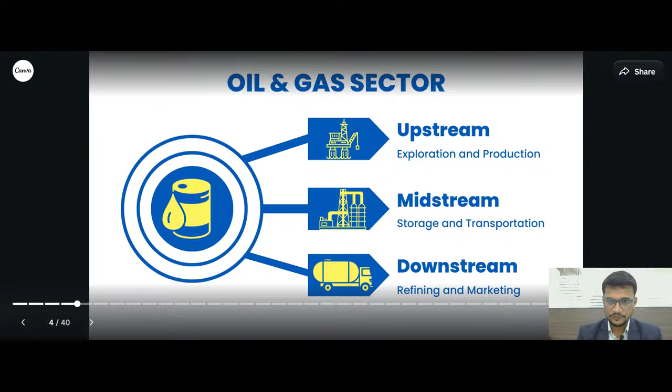Okay, so we'll move further. So as we discussed earlier, during the upstream what we do, during the midstream what we do, and during the downstream what we do.

So as you can see on your screen, there are different industries for different kinds of operations. When I say upstream, what do we do? We extract the crude oil or hydrocarbons from the earth. To do the natural gas extraction or production, the technology provider or equipment we use are different. The same way for pumping oil or taking it out from the earth's crust, there are different technologies. Now, once this crude oil is taken out from the earth, we need to put it somewhere.

So we need to design the storage terminal. Now, when we do piping engineering, it is such kind of training program where we give you knowledge about upstream, midstream, and downstream. So in the midstream, there is the storage terminal and the storage, or we can say the tank farm. So there is the calculation to design such kind of tank farms.

So how much should be the height of the tank farm? How much volume it should occupy? How much space I need to provide on each side of that tank so that if any spillage happens, how to control and mitigate such problems. So each and every concept and calculation is very much important while doing the engineering.

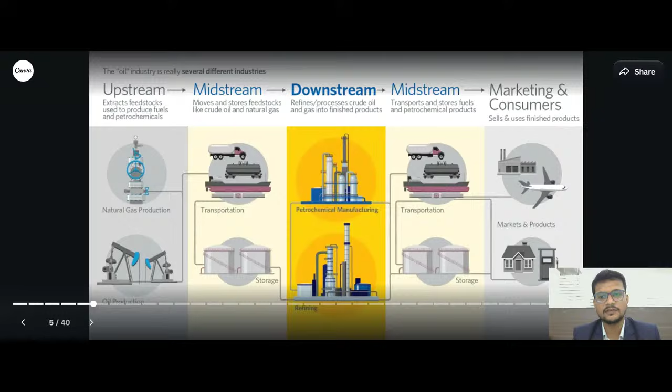So we have to further explain about the export oil and gas opportunity. Oil and gas, also known as hydrocarbons, provide much of the energy needed to power homes, cities, and industries around the world. Offshore wells are drilled by companies to discover oil and gas, or to develop and produce already discovered reservoirs to process into usable energy.

Woodside is Australia's largest independent oil and gas company, known for our world-class capabilities as an explorer, producer, and supplier of energy. Over our 60-year history, we have safely drilled over 600 wells in offshore environments, both in Australia and internationally.

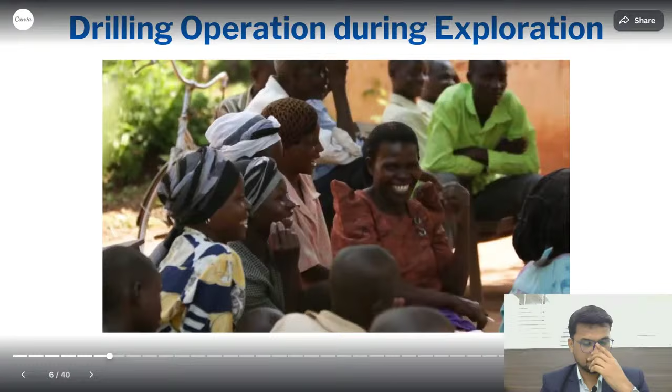Before drilling, Woodside undertakes detailed well design and logistical planning, applying good industry practice to ensure our wells are drilled safely and potential impacts to the environment and other marine activities are minimised. We consult with stakeholders, including local communities and fishers, to explain our planned activities and understand how potential impacts can be avoided or minimised. These potential impacts and other possible hazards associated with the drilling activity are monitored and managed throughout drilling operations.

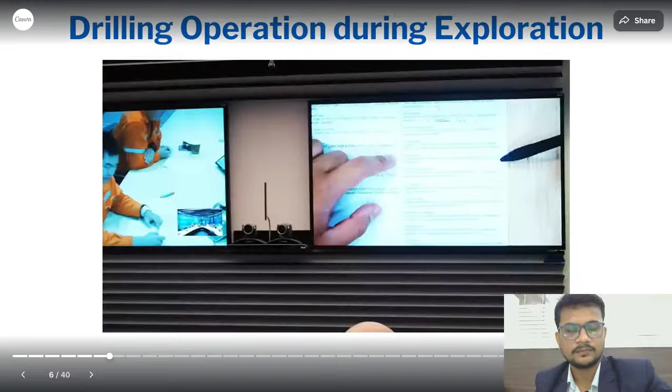Woodside also prepares environment plans that detail how drilling will be undertaken and obtain approval from relevant regulatory authorities before drilling commences. Wells can be drilled by either a drill ship or a drill rig, known as mobile offshore drilling units or MODUs, depending on water depths and other factors. To ensure the safety of other marine users, vessels not involved in drilling should stay at least 500 metres away from the drilling location while in operation.

This is called a safety exclusion zone. Once the well is complete and drilling infrastructure is removed, marine users are generally free to resume normal activities. While technical differences exist, the process for drilling all offshore wells is similar and take place in several stages. Before any drilling, a remote operated vehicle or ROV is sent to assess the condition of the seabed.

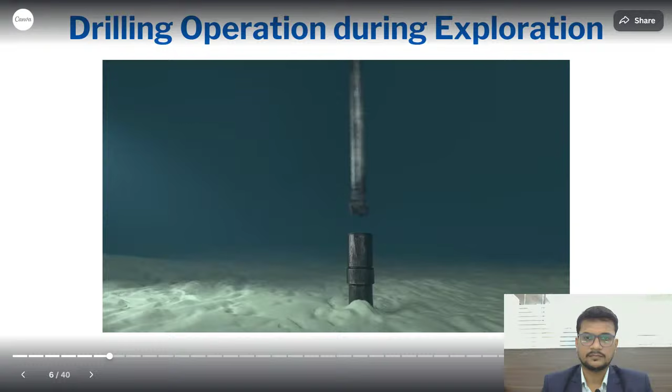A hole is then drilled into the ocean floor using a large diameter drill bit, and steel pipe called a conductor is installed, providing the well's initial structural support. A smaller drill bit is then lowered through the conductor to drill the next section, which is called the top hole. Once it reaches a predetermined depth, more steel pipe called casing is installed, supporting the newly drilled hole.

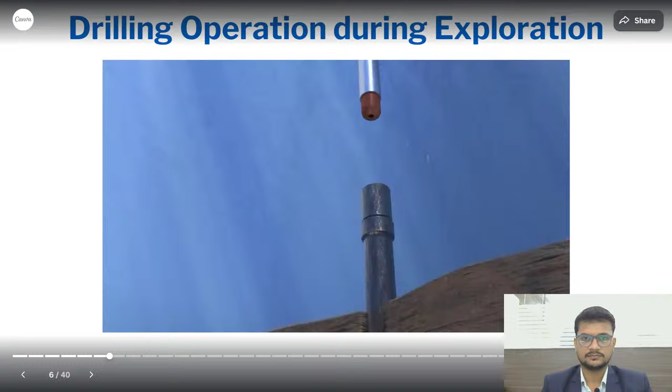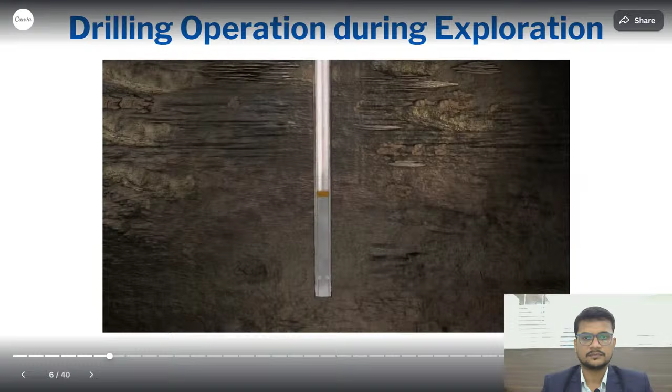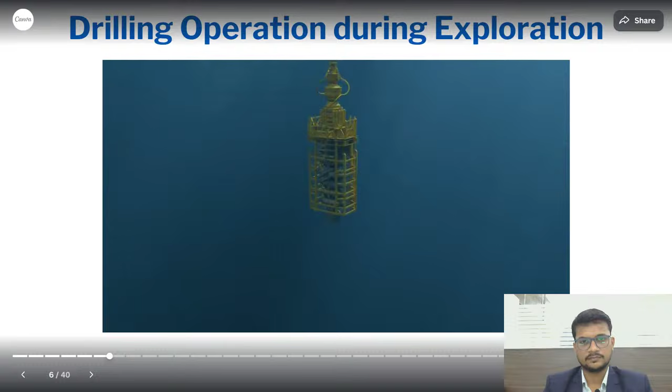Cement is pumped through the casing, moving between the casing and the drilled hole, securing it in the ground. The cement is allowed to set before drilling continues. Before drilling deeper, a blowout preventer, or BOP, is installed on top of the well. The BOP is a large, specialised safety device used to seal, control and monitor wells to prevent uncontrolled release of fluids.

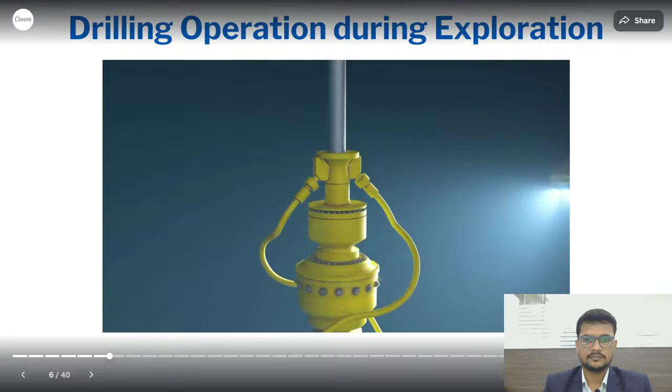After the BOP is secure, a smaller drill bit is lowered into the hole to drill further, and more casing is cemented into the ground. This step is repeated until the well reaches a specific depth where the targeted reservoir is predicted or known to sit. This is called total depth and can be several thousand metres below the seabed.

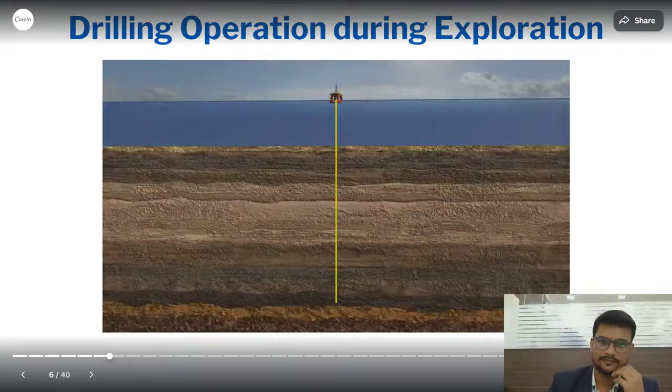Drilling fluid, sometimes called mud, is continuously pumped into the hole while drilling. This helps keep the drill bit lubricated and cool to prevent overheating, prevents the uncontrolled flow of wellbore fluids, and transports drilled rock cuttings back on board.

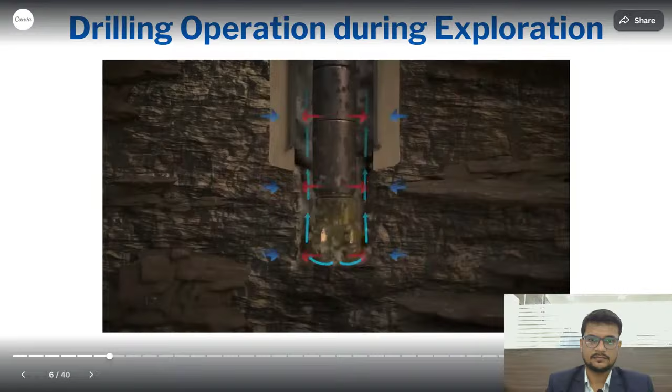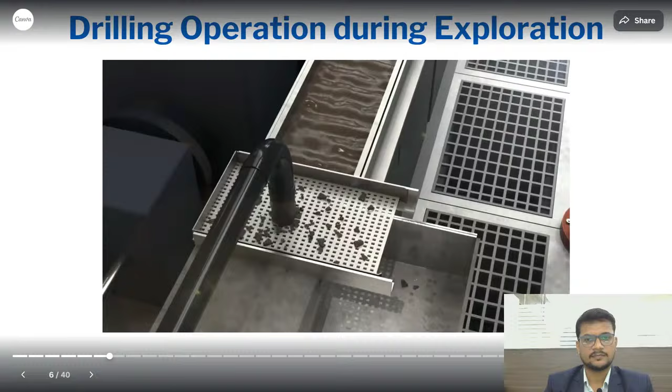Rock cuttings are then separated from fluids using shakers. Fluid is returned to tanks on board the rig. Where required, cuttings undergo additional processing before being carefully discharged below sea level. The volume and properties of drilling fluid are continually monitored to ensure the well is drilled safely.

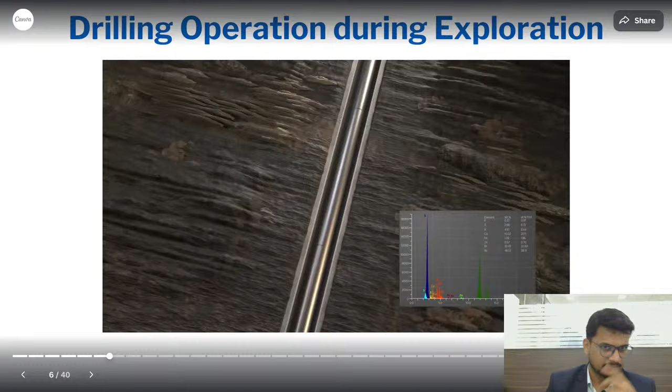Once total depth is reached, tests are run to understand the geological properties of the intersected rocks. Information on any hydrocarbons found is collected through rock and fluid sampling.

The information gathered can be used in a variety of ways, such as informing future exploration activities, development planning, or optimizing production.

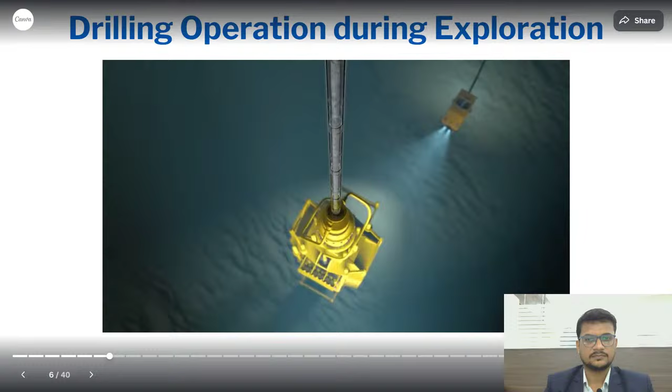Once wells reach the end of their life, they are made safe by sealing them with cement. This is called well abandonment. Before leaving the location, an ROV surveys the seabed again to assess and record the condition of the area.

Woodside takes pride in the health, safety, and environmental performance of our drilling activities. We are committed to world-class environmental management in our exploration activities and in the design, construction, and operation of our facilities to help provide for the world's future energy needs.

So, have you understood, guys, how this exploration takes place? It is pure engineering. We need to first do the survey, figure out the location, then make sure that no maritime activity gets harmed because of that, and then we do the drilling.

If you have heard everything correctly, once the drilling operation is started, we need to put the cement so that the pressure coming out from the walls or the seabed, and at the same time the pressure of the water, is mitigated. Then and only then can I extract the oil from it. This is the basic concept we learn under fluid mechanics.

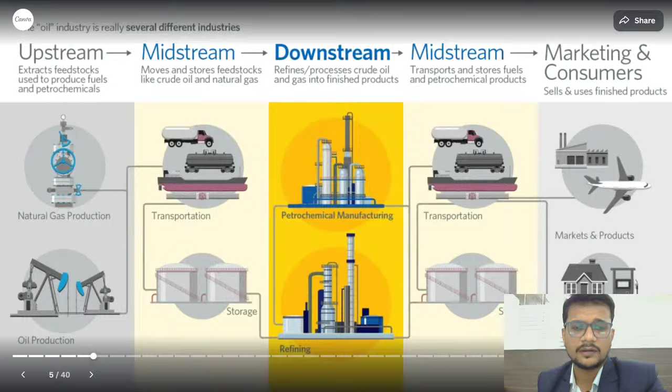So moving further, there are different career opportunities for each and every engineer. Now let's say if I talk about process engineering, so when we say process, we are well aware that mechanical, electrical, civil, EXTC, electrical, IT, computer engineers are all involved.

How, what kind of raw material am I getting? What will be the temperature? How am I going to separate it? What are the different equipments that will be needed? So all this knowledge a process engineer should have.

This process engineering, I'll say, is a starting point of your EPC project. Now the question may come, what is this EPC project? Have you guys heard this before? What is EPC? What is this EPC sector?

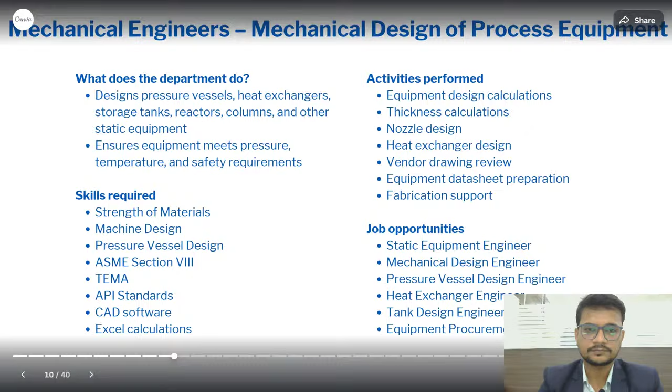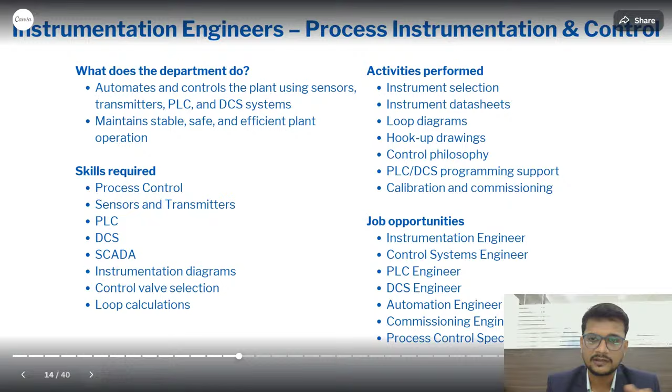Now the question is, what are the job opportunities available? Yes, there are different job opportunities. You can work as a PLC engineer, as a control system engineer, or as an instrumentation engineer. Such jobs are there in the market for a process instrumentation and control engineer.

Now, apart from pure mechanical and pure electrical, there is this new branch which we call MEP. So, have you guys heard before about this MEP engineering?

Have you guys heard of BMS before? What is the BMS engineer and what is its role in an EPC project? Is it related to civil engineering?

So BMS engineer is nothing but a BMS system, where we gather information, where we have sensors, and we put everything under one roof through which we can control the process and monitor the system. Such operations are there in the EPC industry, but only after the engineering and actual construction work is done do such systems come into the picture.

Can a mechanical engineer do the PLC course? I'll rather not suggest doing PLC. They can do the PLC course, but looking at the bigger picture, instead of doing a PLC course, let me tell you what a mechanical engineer can do.

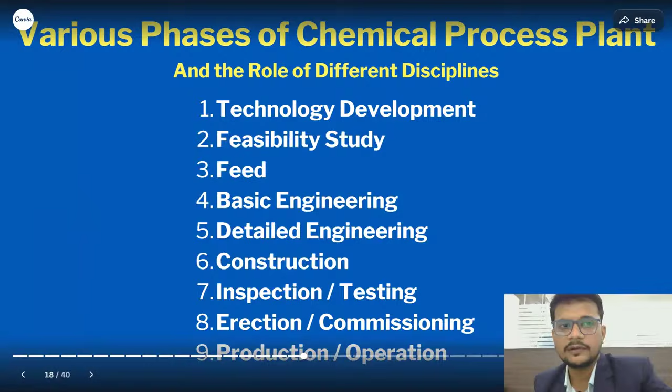So the technology development companies will give you their technology, and this is the combination of how this thing is going to work. This comes under technology development. Then there is the feasibility study - you have the thought and the technology, but whether it is possible to do, whether the place where I am going to put this plant has that capability to sustain, whether I am having that funding, or how much amount is needed to complete this project - this comes under the feasibility study. We'll look at each and every topic in detail here.

So as I said, technology development is the concept development as per the requirement of the client or customer. So I am the client, and I need to manufacture the thing. The technology development will give me the ideas of how we are going to do it collaboratively. So what are the different departments which come under this technology development? You'll be having process engineer, R&D, mechanical engineer, and design of process equipment, because the process engineer will decide what kind of equipment is needed, where I need to put it, how I need to connect it. This comes under your technology development.

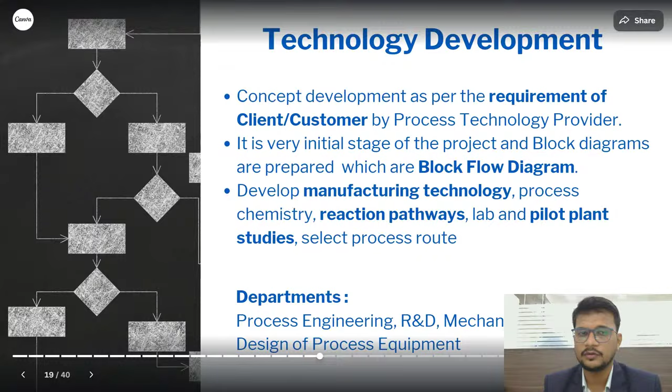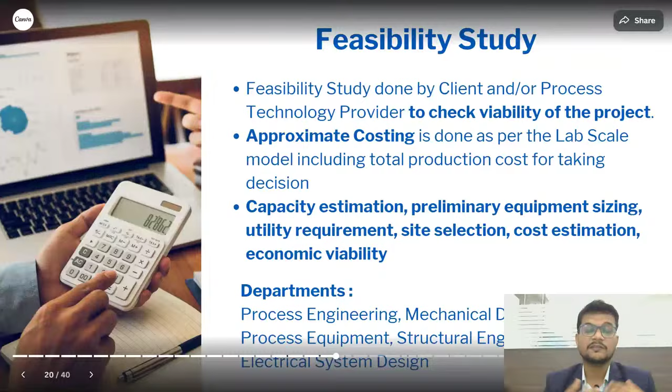Then next is the feasibility study. As I said earlier, I need to check the viability of the project, how much costing it will take to generate this product - this is the feasibility. I need to check the feasibility of the concept. I have my concept in mind, but whether I am able to put it on paper, whether I am able to put it in the actual world - this comes under the feasibility. During this feasibility, we'll be having mechanical engineers, process engineers, structural engineers, electrical engineers - all the different engineering fields will be combined there for this process plant development.

Then once the feasibility is done, what do I need to do? I need to do the basic engineering. Now what is this basic engineering? I need to sketch out that this equipment will be there, this is the process, this is how it is going to flow, I'm going to mix it here - such kind of rough structure I need to put, and that comes under the basic engineering.

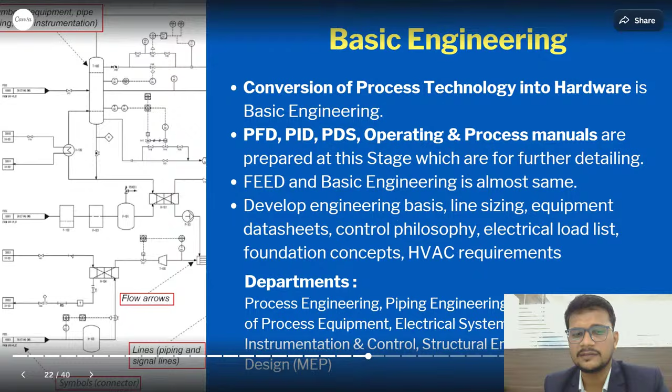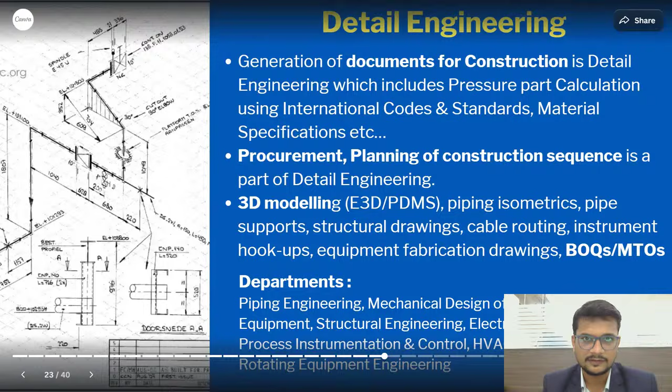So once this basic engineering is done - now you can see the previous photo where we are just putting a schematic, like this is the equipment, this is the line, this is how it is going to do. In the detail engineering, I need to put everything in such a way that based on this detail engineering, the actual equipment, the actual length of pipe, the quantity of pipe, the quantity of equipment, everything is going to be purchased. That's why detail engineering is very much important and crucial, because during the detail engineering, the piping department, process department, structural, electrical, HVAC - everyone should be on the common ground. Then and only then the equipments will be finalized. So this is how we do the detail engineering.

Then comes the construction. Now I've done the detail engineering, now I need to fabricate the equipment, because in the detail engineering it is mentioned 2 meter length of pipe, this equipment should be there, this is the height of that equipment, and this is how we need to connect it with such processes. So everything which is mentioned under the detail engineering, I need to complete it under the construction. So your foundation work, civil erection, equipment installation - everything comes under the construction stages.

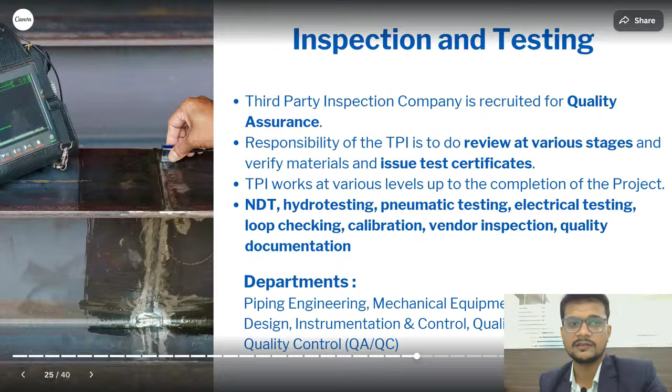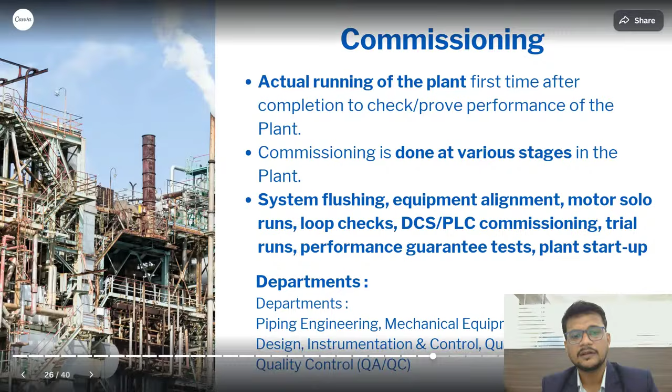Then the last stage, which is operating, maintenance and training. Now the commissioning is done, then I need to hand over this project. So when doing the handover, I need to train the next set of people who are going to handle this project - that comes under training. Then maintenance and operations will follow. Here also I need piping engineers, equipment engineers, electrical engineers, and instrumentation and control engineers. At each stage, every engineer should be present.

So let's see the overview of the process plant, how it looks like.